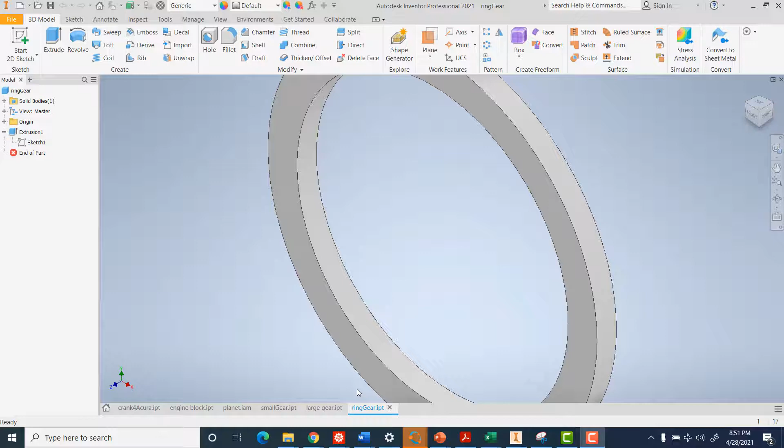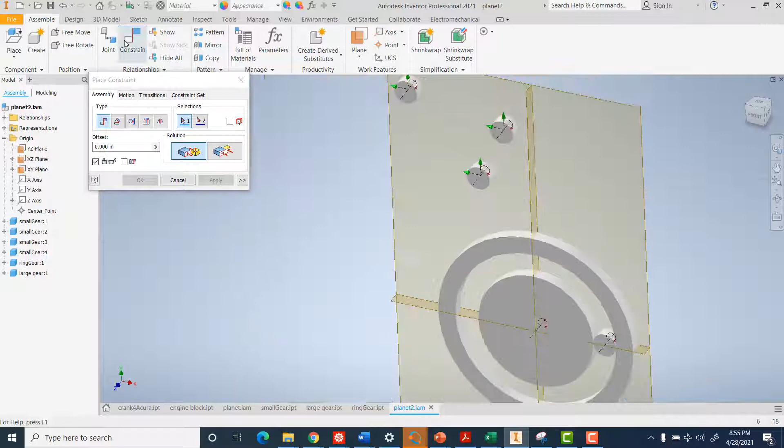Okay, so right now, just real quick, I made 3 different parts. The planet gears have a diameter of 2 inches. The main sun gear has a diameter of 10 inches. So gear ratio 10/2 is 5. And then the ring is going to fit around the outside of them. So radius of 5 plus 2 equals 7, or diameter of 14 on the inside of this.

And I made everything an inch tall. I'm temporarily constraining them in place. It's going to be tricky to get these guys moving correctly, but I'll at least get them all in the right place to start with.

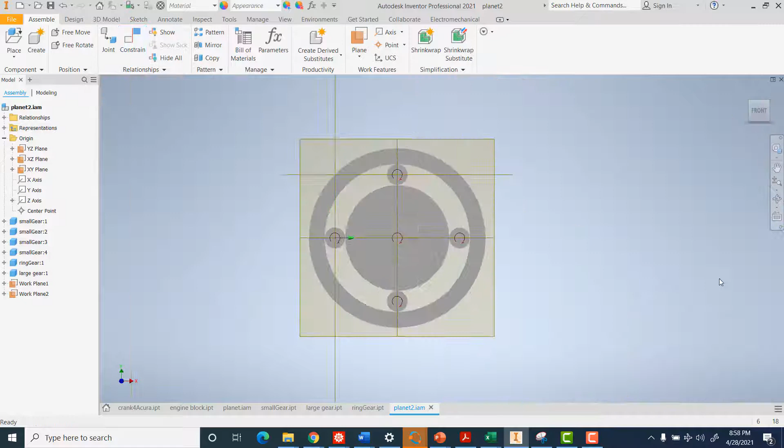Okay, the next thing I'm going to do is create the spur gears, and these are actually going to use the cylindrical parts that I've already created. So I'm going to select module and number of teeth. This will let me change the gear ratio. So I'm going to do the sun and the planets first and the ring last.

So 10/2, gear ratio of 5, and then center to center distance. So radius of the inner gear was 5 plus 1 for the outer gear. So I've got a 6-inch center to center distance. And I'm not going to create both of these together. I'm going to say no model for gear 2. And you can see which is the small gear and which is the large gear by the number of teeth over here. So I'm going to start with the small gear.

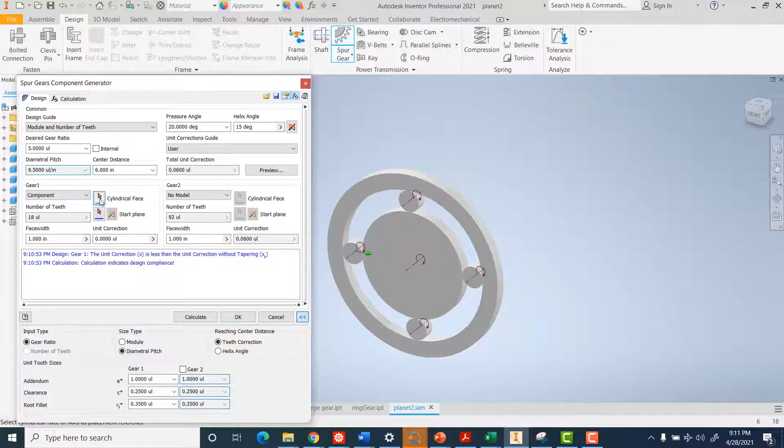And what we're going to do to create it is actually click on, in this case, the small cylinder. So this is a smaller number of faces. I'm going to click on the cylindrical face, click on the starting plane. It looks like that is popping out instead of in. I'm just creating this one, and I'll say okay, okay. And so now I have spur gear 1 as well as the original small gear. So they're kind of right here on top of one another, but you'll see that spur gear has been created the same size as the small gear.

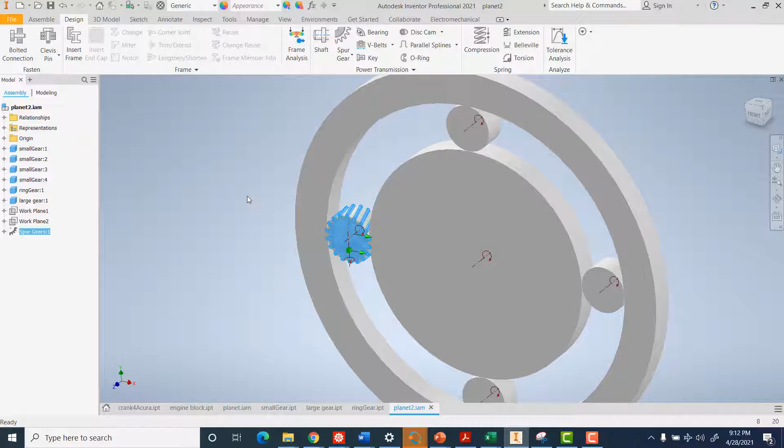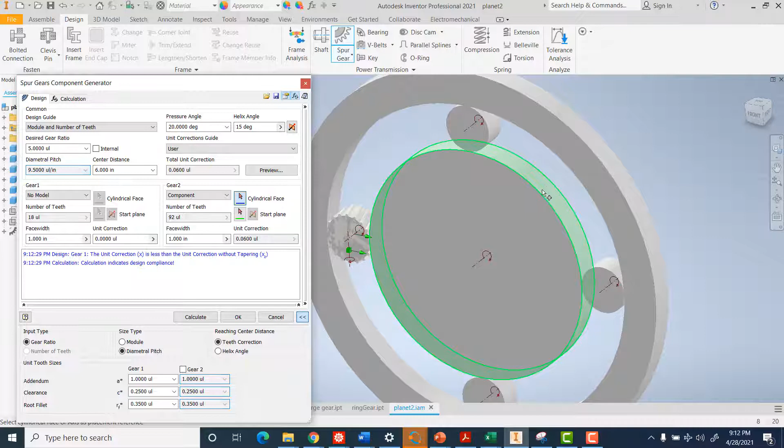Okay, doing that again for the next one, and once you have all of this set up, it'll bring up the same numbers that it had before. So this time I'm going to change it to no model on the small gear and component on the large gear. And we'll just see if we can get this sun gear to match up. So again, cylindrical face, and I'm going on the outside of that cylinder. And then the starting plane, pop it down so it's the right direction. We'll say okay.

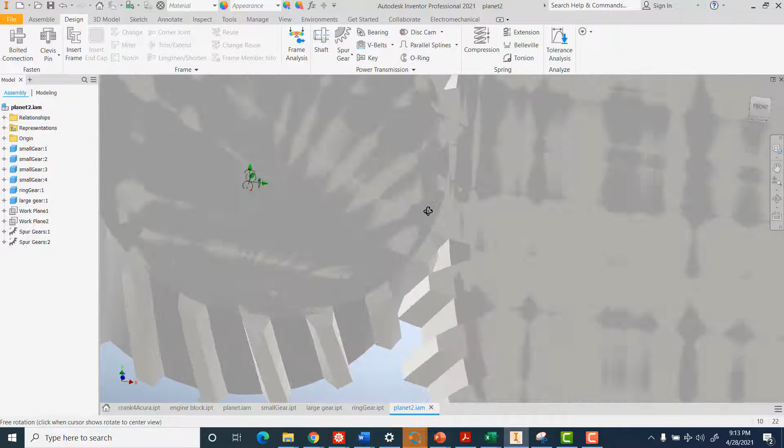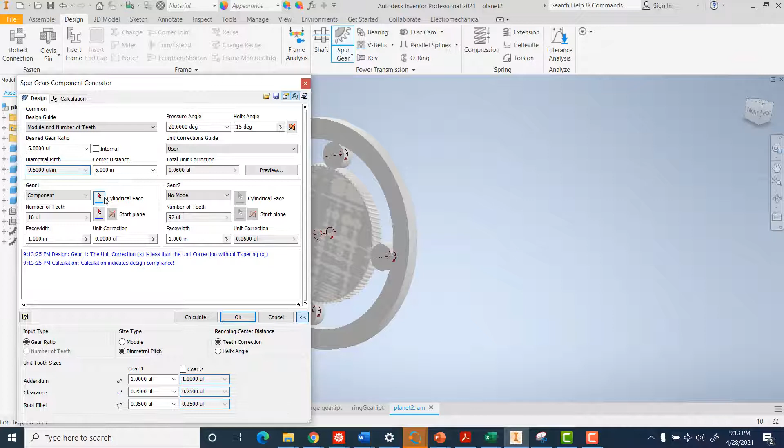And we've got kind of a little slant on these guys. So if I zoom in, the teeth ratio and the teeth size and everything, it's done this. So these guys are going to fit into one another very nicely. Okay, I've got 3 more small gears to go. And we'll do those just the same as the first gear. So again, I'm going to say no model on the large one, component on the small one. And we're just going to go from gear to gear.

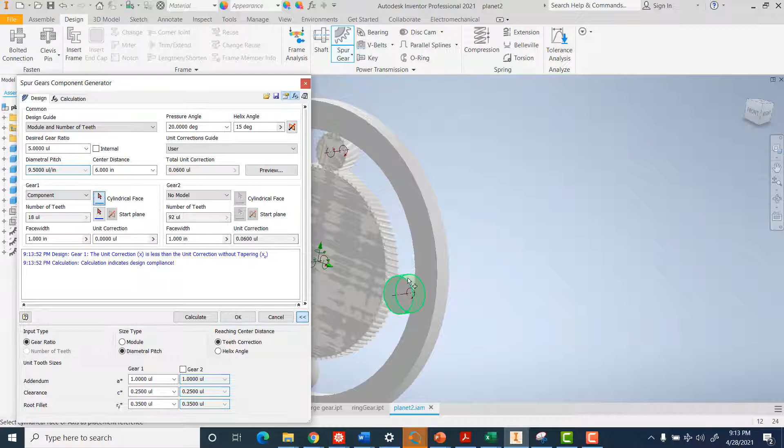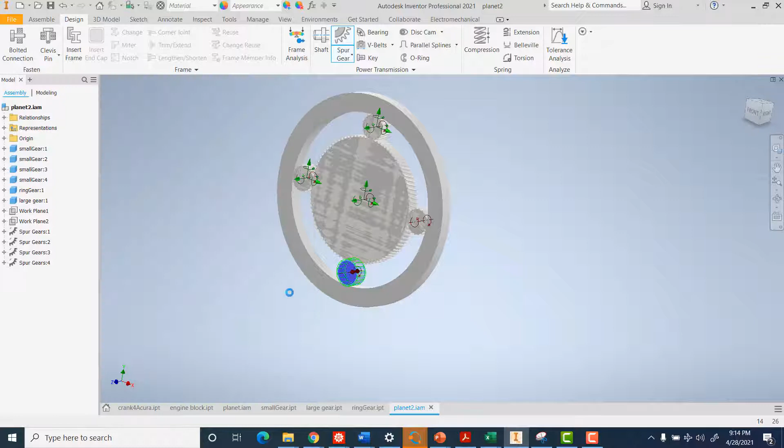Click on the face. Here's the cylindrical face. Here's the starting plane. It gives you a preview. So there's the next one. And just keep working your way around this thing. So cylindrical face. Start plane. Okay. Probably should save this every now and then. Okay. So now we have all of these guys.

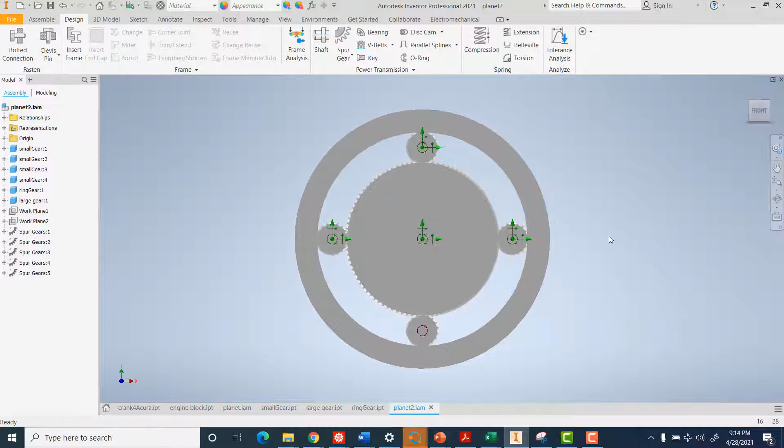If you want to get these rotating okay, and I don't have these constrained to stay in place, really I should have nothing but rotational motion on all of them, but to start, maybe I'll wait on the constraints for this one. Let's just get these guys built. Okay, that was the inner gear.

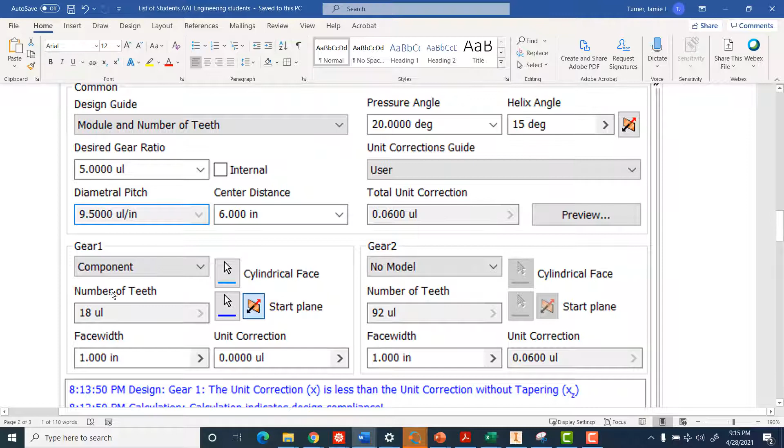For this next one, we're going to have to do a little bit of calculation. So the equation that I found was the number of teeth in the ring gear is equal to 2 times what's on the planetary gear plus what's on the sun gear. So if you remember when we started it out, this was 18 teeth on the small planet gear, 92 on the sun. So 2 times 18 plus 92 is 128. So we need to create an outside ring gear with 128 teeth that is going to mesh together with those other guys.

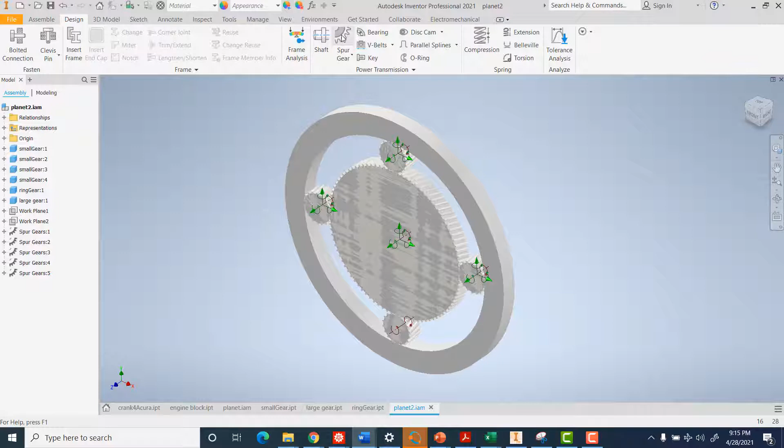And this is a little bit tricky to get right. So I changed it to purely just the number of teeth. And the center distance for internal, making that outside ring gear, is actually going to be the distance between the center of the ring gear, which is the center of the whole system, and the center of the planetary gear. So we're back to 6-inch difference between the two. And for the number of teeth, I want to get 2 times 18 plus 92, I want to get 128 teeth on here.

And it's a little bit different gear ratio. So the ring gear to the planet versus the planet to the sun, those are different ratios. And to get the right number of teeth, it's easier to, so I'm not going to say okay, I'm going to say calculate, and it's going to calculate the number of teeth. So 7.1 ends up being the gear ratio for the outer to the inner. And you're looking for that number of teeth, because you may be using some different dimensions than me. For this one, I'm going to say no model, because I'm making this outside large gear.

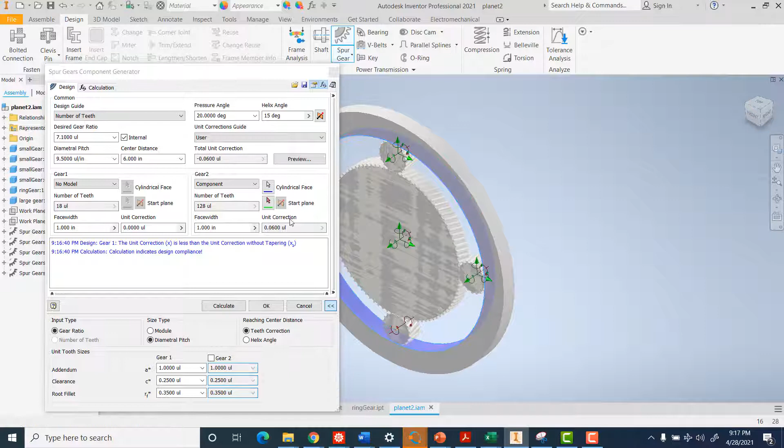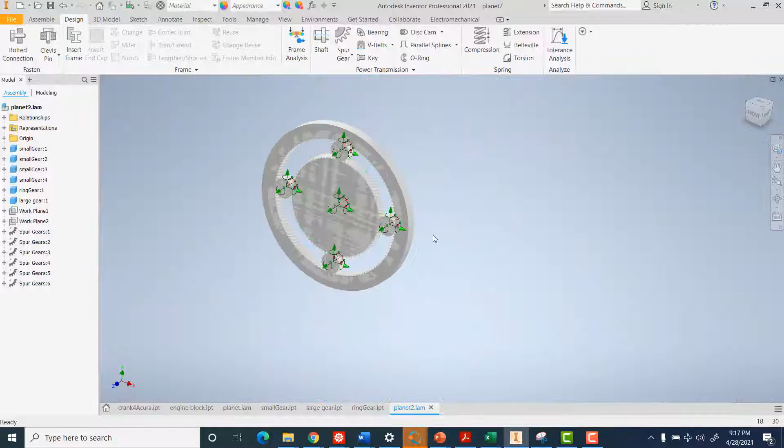So then again, I'm going to do the cylindrical face. I'm going to do the outside, make sure that's going the right direction. Okay. Let it make that ring gear. And now what we have is teeth lining up on the inside and lining up on the outside. So yay!